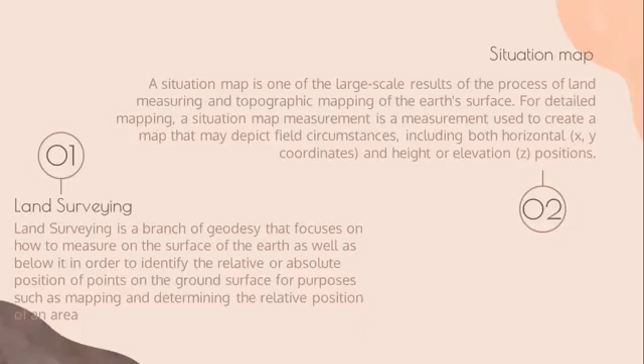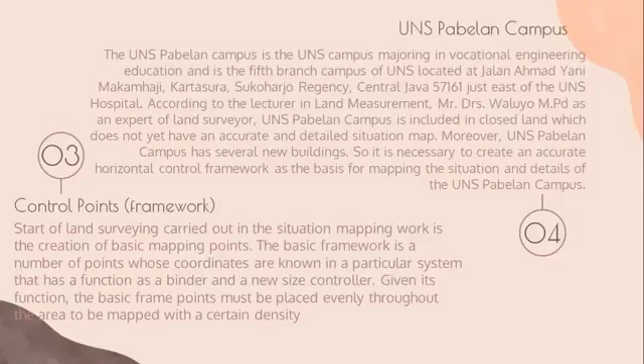According to the lecturer in land measurement, Mr. Drs. Waluyo M.Pd, as an expert land surveyor, UNS PABELAN campus is included in closed land which does not yet have an accurate and detailed situation map. Moreover, UNS PABELAN campus has several new buildings, so it is necessary to create an accurate horizontal control framework as the basis for mapping the situation and details of the UNS PABELAN campus.

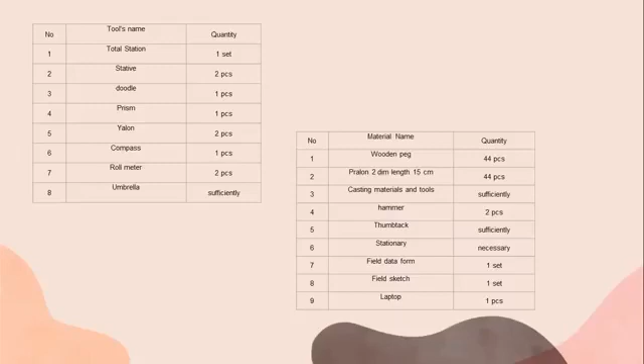Materials and method. These are the tools and materials. The tools are a total station, stative, doodle, prism, yalon, compass, roll meter, and umbrella. And the materials are wooden pegs, pralon, casting materials and tools, hammer, thumbtack, stationery, field data form, field sketch, and laptops.

This research was carried out in stages in the period January 2021 until June 2021. It includes the stages of preparation, benchmarking, land surveying, and data analysis, as well as description of the horizontal control framework. The study used an experimental method where the experiment used is direct land surveying on a closed land. The closed land is the UNS PABELAN campus, which does not have an accurate situation map.

Data analysis. The data from the survey work will then be analyzed using the closed polygon measurement method, which is described as follows. A closed polygon is a closed shape or ring so that it forms a polygon of n. n is the number of points of the polygon.

The geometric conditions for a closed polygon in terms of angle measuring are: sigma beta equals (n minus 2) times 180 degrees, and sigma beta equals (n plus 2) times 180 degrees. Equation 1 is a calculation using interior angles. Equation 2 is for calculation using exterior angles.

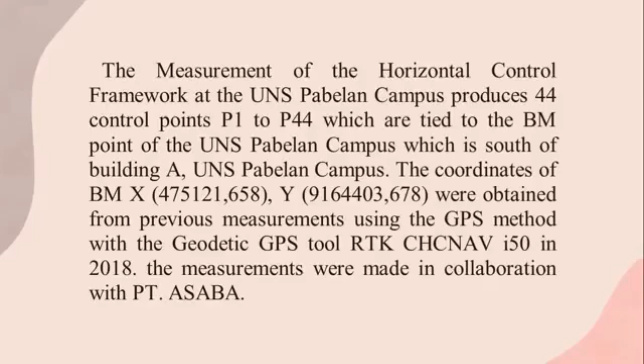The coordinates of the BM, which we can see on the screen, were obtained from previous measurements using the GPS method with the geodetic GPS tool, RTK CHCNAV i50, in 2018. The measurements were made in collaboration with PT Asaba. In this measurement, the researcher used a total station with an angle accuracy of 5 seconds.

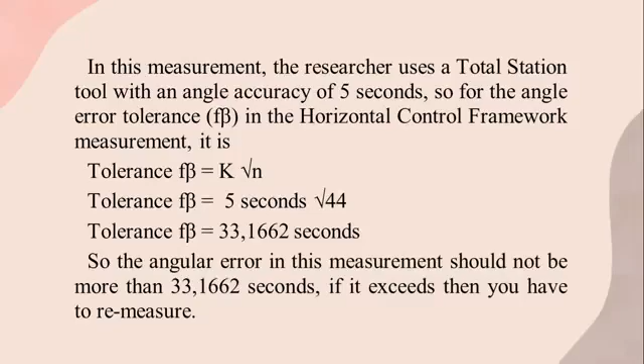So the angle error tolerance, f beta, in the horizontal control framework measurement, we can see on the screen. So the angular error in the measurement should not be more than 33.1662 seconds. If it exceeds, then you have to remeasure. From the measurement results of the horizontal control framework, it can be seen the resulting angle correction meets the angle error tolerance according to the closed polygon method.

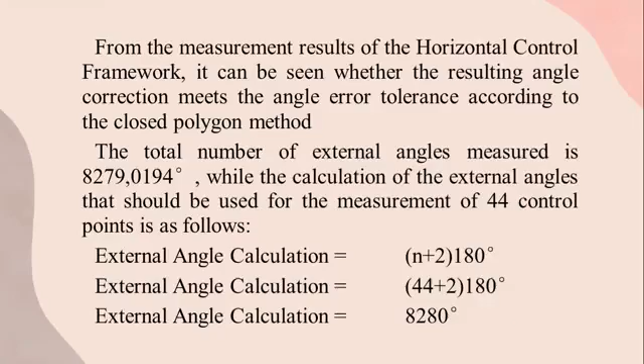The total number of external angles measured we can see on the screen. While the calculation of the external angles that should be used for the measurement of the control points is as follows. External angle calculation equals 8,280 degrees. So the angular error generated in this measurement is f beta equals 3,530 seconds.

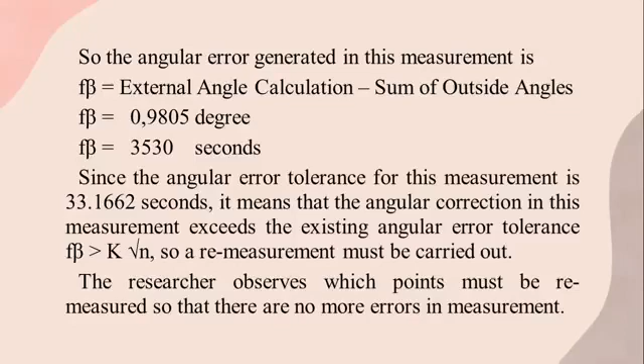Since the angular error tolerance for this measurement is 33.1662 seconds, it means that the angular correction in this measurement exceeds the existing angular error tolerance, or is more than k√n. So remeasurement must be carried out. The researchers observed which point must be remeasured so that there are no more errors in measurement.

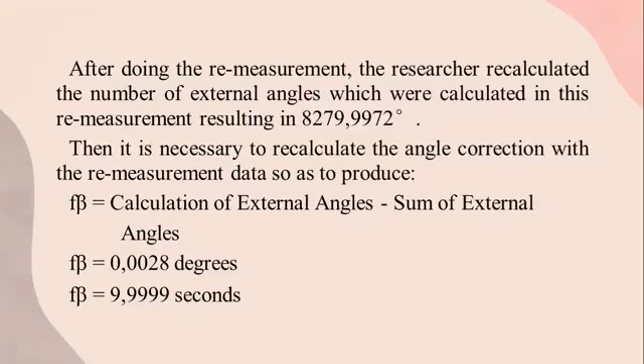After doing the remeasurement, the researchers recalculated the number of external angles in this remeasurement, resulting in what we can see on the screen. Then it's necessary to calculate the angle correction with the remeasurement data so as to produce f beta equals 9.9999 seconds. So the angle correction for this remeasurement is 9.9999 seconds with an angle error tolerance of 33.1662 seconds.

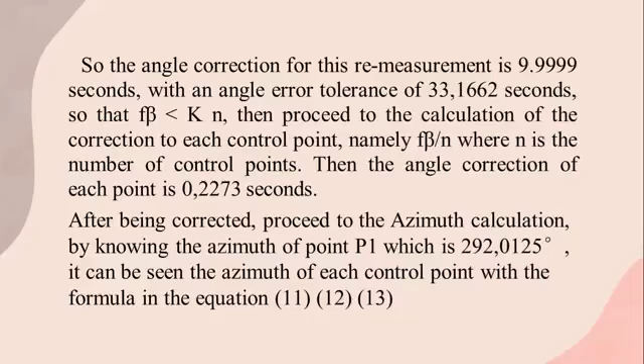So that is less than k√n. Then proceed to the calculation of the correction to each control point, namely f beta per n, where n is the number of control points. The angle correction of each point is 0.2273 seconds. After being corrected, proceed to the azimuth calculation by knowing the azimuth of point P1, which you can see on the screen. It can be seen the azimuth of each control point with the formula in equations 11, 12, and 13.

From the result above, the coordinates at the starting point P1 and the end point P1 are different. Therefore, there is an abscissa correction Fx of 1.1031 meters and an ordinate correction Fy of 0.2023 meters. With these results, TL equals 0.0014 and FL equals

1.215. After obtaining the definitive XY coordinates from this measurement, the researcher continued to create a horizontal control frame drawing based on existing and accurate data using the AutoCAD application.

Conclusion. This research produced 44 control points as a horizontal framework using the closed polygon method, stating that the resulting horizontal control framework meets the requirements of angle correction, abscissa correction, and ordinate correction, so that this horizontal control framework can be said to be accurate and can be used for further research, namely the mapping of the UNS Pabelan campus.